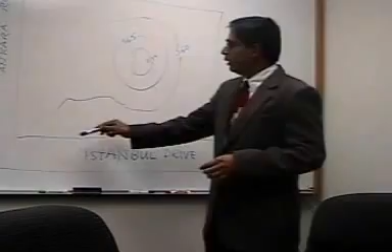Okay, so this is a property. Just for an example, say this is an agricultural land, and this is one street here. So the client comes to us and says, okay, this is agricultural land and I want to make it single family housing. So what we do first, we put the layout of his lots or plots, however you want to call it. That means one person owns this property.

We divide this property into maybe 100 lots or 50 lots, however the client wants. So first of all, we put a layout of all the lots. Layout means put in the street and divide this one. And this is not one single process. It goes by iteration, meaning trial and error until the client likes it.

And these are the existing contours, which show 570, 565 and 560. That means it's a little bit high here and it's going down. There is a street and there is a creek behind this property. It's a very simple property. I'm just using this as an example.

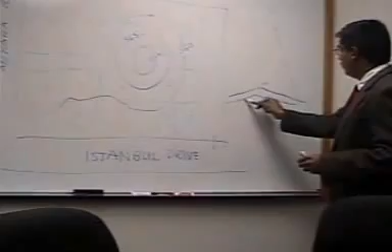So we need to design the street first, because in land development, the street is the backbone of the whole thing. If you cut a cross section from here, the cross section will be like this. This is 70, this is 70, and this is going down. This is the existing ground line. We designed the street in such a way that it will cut the existing ground and put the dirt from the street to the pad, so the pad will be a little bit higher.

The reason is, for the drainage, and I'll explain a little bit more, we want all the water from the pad to go to the street, so that the street will work as a channel to convey the water eventually to either a creek or some other existing storm line. The storm and sanitary are two different systems. Both pipes carry water, but one carries storm water and one carries sanitary water.

So we profile it in such a way; it's called the geometric design of this road. I told you all the branches of civil engineering are involved. There's the transportation part. We designed this.

I'm explaining in very, very short time. So now from this street grade, proposed grade, we put our spot elevation here, here, here, everywhere. Then from this street we put this spot elevation, meaning the elevation from the proposed grade, and we do the lot grading.

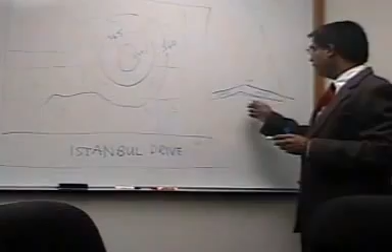Because if it's too steep, then it's not very convenient for drivers to drive. If it's very little slope, then water will not drain. So we don't put more than 10 or less than 0.5. So after profiling, we go for lot grading. Mustafa will explain lot grading to you in detail, because I don't want to go that far. I'll explain the overall.

Okay, let me tell you one thing. This is a lot, but nobody can build his house in the whole lot. There is a setback. It's called pad. Pad means the area of the lot where the people can build a house, because they need a front setback, side setback, back setback.

I told you before that I'm covering only single family residential detached houses. There are others, maybe townhome, maybe multifamily. Multifamily means apartment or multi-story house, but I'm not going there today. I'm just giving you single family. So this is a pad.

So we design the elevation of the pad from the street grade. We know this elevation, this elevation, this elevation. We design it in such a way that this person's water will not go to this person. We want to drain everything to the street. You mean water is storm water? Yeah, I'm talking about the storm water first. After 10-15 minutes of storm water, then I'll go to the drinking water and the sanitary water.

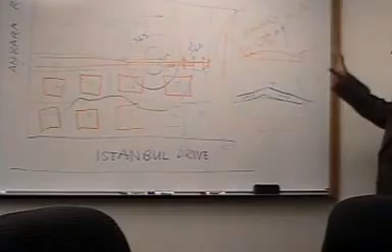We use this for open channel, for the pipe, and also for the pipe system and open channel, for both. So with this equation, we calculate the size of the pipe, like how much Q is coming here. Say 5 CFS water is coming here, then 10 CFS is here, so 15 CFS is coming here.

So now I'll go a little bit into pipe design. What we'll do here, say this point is called the head wall, that means at the exit point, and this is your pipe, that is your inlet, this inlet is somewhere else here. So from this inlet 5 CFS water is coming, here is 15 CFS.

And the main thing in designing the pipe is backflow analysis. That is very, very important. There's a water from the creek that will not come out through the inlet. That means the backflow analysis we have to do every time. The most important thing is you do backflow analysis so that the water will not come out from the inlets. How we do that, I'll give you a little bit idea, it's a 100-year flood.

What is the 100-year flood elevation? We know, say 550. So again, from the Manning's equation, if we know the Q, we know the velocity, we know the slope of the hydraulic grade line. So we start from the 100-year flood here, then we go from this length with this slope, we get this hydraulics, and then there is a jump on the hydraulics because the velocity is more than here.

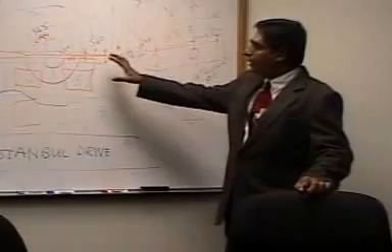So, are we going to talk about the sanitary now? Yeah, so they get a little bit of idea about the paving, get a little bit of idea about the storm. Do you think anything I should tell about the paving? I think that's enough for a short time. Oh yeah, that's enough for sure.

Okay, good. Now I'll go to the sanitary. Very interesting.

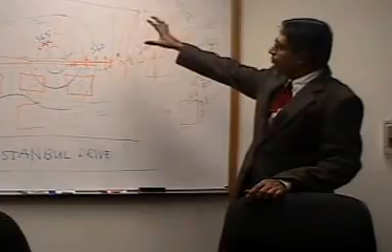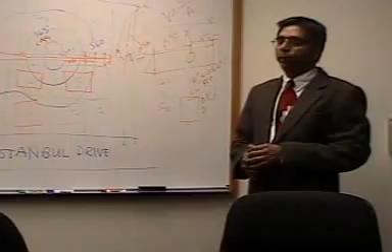When the city, say this city, they have already their master plan. So on their master plan, they know what they have, the population calculation, what will be the population after 20 years or something. That's the way they do it. I'm talking about the sanitary now, then I'll go to the water.

So they design their master plan. On the master plan, they already have sanitary here. The big pipes, this pipe may be 16 inch or whatever it is. It's very, very big pipe. This is done by the city.

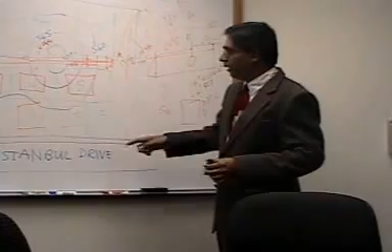When we connect our sewer line, if it's very little, like 10, 20, 30 houses, we don't need to calculate anything, because we know this pipe has the capacity to carry the sanitary sewer that will generate from here. But if we have a very big development, normally we use 8-inch PVC, sometimes 6-inch PVC for sanitary sewer, if there's very little population.

Okay, now we put the storm line here, we put the sanitary line. Maybe some cities say within the pavement, some say not within the pavement, between the pavement and the right of way. So wherever we put the sanitary, it goes like this, and eventually it connects with this, with the manhole.

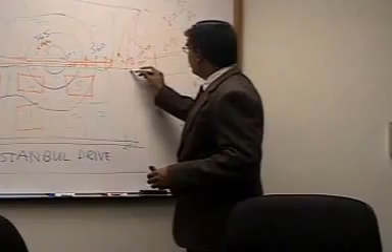We have to put the manholes wherever the pipe changes direction, or every 500 foot. Some cities say 500, some cities say 400 foot. We have to put the manholes.

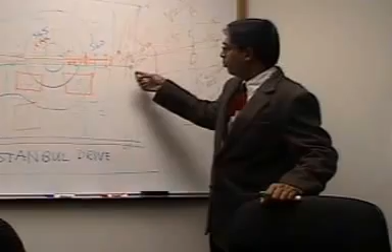So you put the pipe and you put the manholes, whenever it changes direction, you have to put one. I think this is a high point, so we can put it like this. So this house will be connected here, and we put it here. So this sewer will go this direction, this sewer will go that direction.

So I told you, if it's a very little area, then we don't need to calculate anything. We can use 8-inch PVC pipe and a couple of manholes and connect with the existing sewer line. As I told you, this is already done by the city sewer line, so you can connect here directly. But if you don't have that, meaning the city doesn't have this line already, or your development is such a big development, then in that case you cannot just put an 8-inch sewer line and connect here.

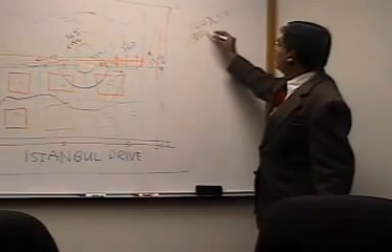You have to do some kind of calculation. The way we do the calculation is, I can show you: say per capita 100 gallons per day, 100 gallons per day per person. And the way we calculate that, each house has 3.5 people. So 100 times 3.5, 100 gallons per day GPD per person.

Then we have some peak factors. Peak factor means a certain period of the day when the demand is very high. It depends on the city, depends on the culture, depends on the country. If everybody goes at the same time to the bathroom for taking a shower or something, at a certain time, in a very short time, there's a peak factor. So it depends on the peak factor. Some cities say 5. If the population is less, you have to use a 5 times peak factor.

So your peak factor is 350 plus, multiplied by 5. Is that correct, Mustafa? I don't know. Looks like that. Gallon per day.

So this many gallons per day, 1750 gallons per day per house. And if you have 50 houses, then multiply by 50, equal to 8,000 or whatever it is. Maybe say 100, you have 100 houses, so 175,000 gallons per day.

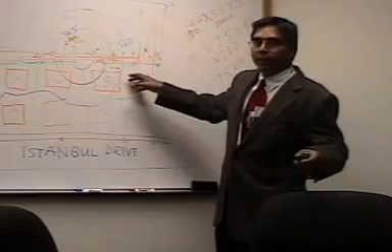Oh, you're talking about the water from the garden? Yes, watering the garden. The water from the garden will not go to sanitary, it will go to the street. When this guy puts water on his garden, this water will go to the street, and from the street it will go to the inlet, and from the inlet it will go to the pipe and go to the creek.

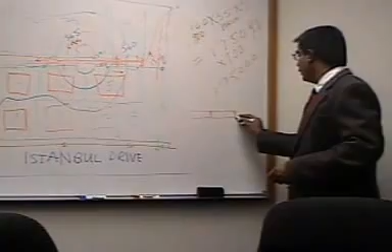But one thing we miss is that if it rains, the inlets and manholes are not watertight. So when it rains, some water goes through the manholes, and all the PVC connections, the pipe connections are not 100% watertight. So some water will go through that connection, and you have to add this plus infiltration.

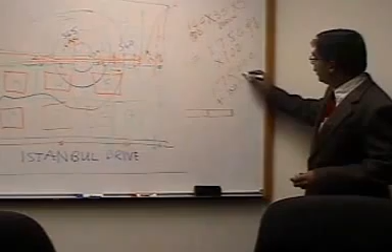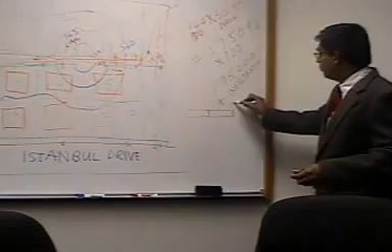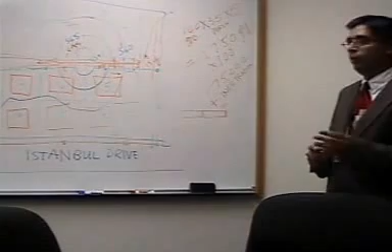It depends on how the city calculates that. If each city has like per acre this much or per mile this much, you add it all, and that is your total Q for this population, for 100 houses. Then you use the Manning's equation again, that I told you already: 1.486 divided by n, AR to the 2/3, S to the half. You put that in and you get the size of the pipe.

That's the way you calculate the size of the pipe in the sanitary sewer. Is there anything on sanitary sewer, Mustafa? I think you mentioned all what I'm prepared for. If you have any question, you can ask Mustafa, he can answer. He does all these layouts and design.

So we put the manholes, and sometimes we put the clean out. Sometimes normally we use PVC, some cities say no. If you have a pipe very close to sanitary and storm, sometimes the city says you have to put some kind of encasement, concrete encasement. Sometimes we put ductile iron pipe if you don't have enough cover. I think that's all, right Mustafa, on the sanitary?

Yeah, for storm I would like to ask about the pond, why we need a pond. Oh, okay sure, I'll stop here on the sanitary. Mustafa has a question on storm: why we need the pond. There's a couple of reasons I'll say we need the pond.

Say you have one existing... say this is a creek, don't worry about this creek, say this is a creek, and this is a road. Think in this way, okay? So you already have existing pipe here. Now this is no more creek, okay, it's a street now. That's the way I'm showing Mustafa. So this pipe is already built, and it has certain capacity.

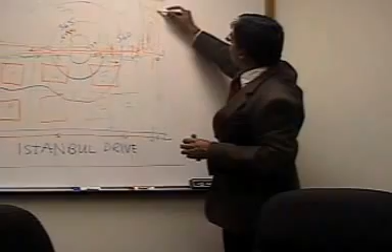You detain the water there. You cut the pond like this, so it has a certain volume. So you detain the water and then release it at a certain rate. The way we calculate this is called the modified rational method.

One thing I forgot to tell you, how we calculate the storm water is the rational method, which is Q equal to CIA -- everybody uses this. C is the factor, depends on the soil type and vegetation. I is the rainfall intensity, and A is the area. So to figure how much water is coming here, we divide the area into small catchment areas, and that gives us the peak Q, the water coming here.

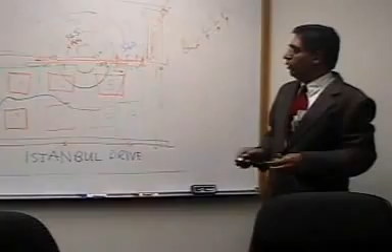I forgot to tell, okay, same thing for how much water is coming to this inlet -- we divide it, we draw a small drainage area map. From there we calculate how much water is coming to each inlet. So to answer your question on that pond, we detain the water to release it at a small rate.

Number one. And number two is, sometimes in an undeveloped condition, there's less surface flow because most of the water goes down, since C is very low, maybe 0.3 or 0.2 or 0.35. But when you build this, C goes higher, maybe 0.6 or 0.9, so you have more surface water. But sometimes the city says no, you cannot drain more water, you have to drain only the undeveloped flow. In that case, you have to build a pond too.

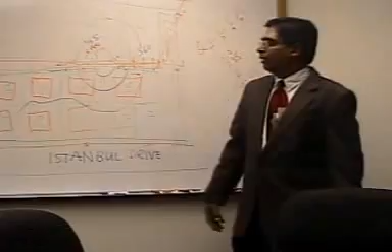Okay, now I'll cover how we design the drinking water. Again, there are a couple of ways. Number one, the city has already, in the master plan, put the drinking water line. Maybe a big size pipe, 48 inch or a couple of 60 inch or more than that. So they already have the drinking water line here, maybe here. If it's a small development, then we don't need to calculate anything. We just connect with this line and this line.

But here, the very important thing is, you have to put fire hydrants. This is our pavement. This is your water line; it comes here, goes here, meets here. So you have to put your fire hydrant. It depends again, every 500 foot or 400 foot. Okay. So that in case of fire, they can open the lid, connect the connection, and then that is used for

fire prevention. But if it's a big development, again like sanitary, then we have to think how to calculate this. In this case, Mustafa, we use 100 gallons per day for the wastewater, and for drinking water we use 245 gallons per day. I'm talking about one city. Some cities may be different. And then the same thing, 3.5 persons per house. There is no peak factor.

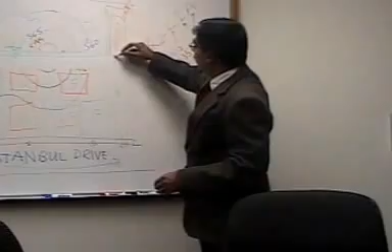Okay, each and every city has their own criteria, but you should have enough pressure on the pipe so that the fire hydrant has enough pressure in case of fire. So your pipe needs to be designed such that each and every node, meaning each connection, has enough pressure. It's done in the computer; you have to run the model and then see.

Other than that, I think it's pretty simple. If you don't have to run the model, if it's a small development, just connect 6-inch or 8-inch, normally 8-inch PVC, to the existing water line, and you're good to go.

I always wonder, we are always designing water, sewer, and storm, but we didn't design natural gas. How do they have the natural gas? How are they connected? Okay, very interesting. There are two types of utilities: wet utilities and dry utilities. Wet utilities are water, sewer, or storm. Dry utilities are phone, gas, and electricity.

We normally don't design those in our office, that's correct. The gas company has their own design engineer, and our general contractor cannot connect their pipe. They have their own contractor and their own design. So does that mean after the contractor develops the site, they come, dig the site, and build? What's their process?

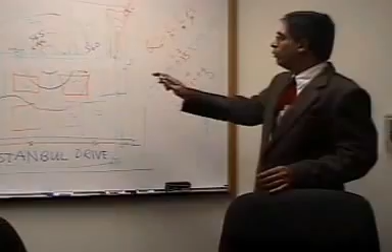No, normally they don't run under the pavement. Okay. That's the reason there's the right of way. The right of way means this is the area. At the beginning, I'll tell you one thing, that this development is private development, but one time the city will accept this one, and the city will maintain the paving, water and sewer. It's a public property. So the right of way means, although the pavement is here, this is the whole area that will be public.

This will never be public, because this is this guy's property. But this right of way is the city's, and all the dry utilities will go here. Yeah, I understand. So they will put that after. That's the reason when we design, we don't put sidewalk. Builder puts the sidewalk. Because if we put the sidewalk, and those franchise guys come, they need to tear off the sidewalk. So the developer doesn't put the sidewalk in front of the house. The builder puts the sidewalk.

Let me tell you how we calculate the size of the inlet. There's a couple of ways to calculate the size of the inlet. The easiest way, but it is very important where the inlet is located. If the inlet is located in the sag, that means it has very large capacity. But if the inlet is located in the street with a very steep slope, I'm talking about the street slope, if the street slope is very high, the inlet has much less capacity. So the location of the inlet is very important.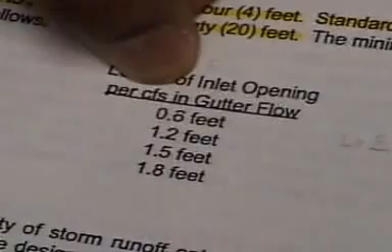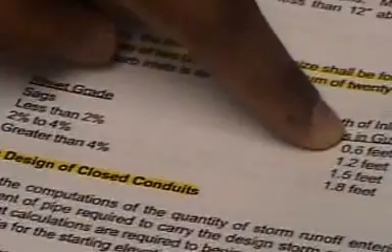I can show you the street grade and the length of the opening per CFS, that means cubic feet per second, of gutter flow. I think in the metric system it can be cubic meters per second or something. So for street grade, if it's in the sag, then your inlet size is 0.6 feet per CFS. So if the street is in the sag and you have 10 CFS of water to the inlet, the opening of the inlet will be 6 feet.

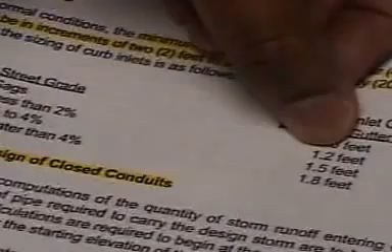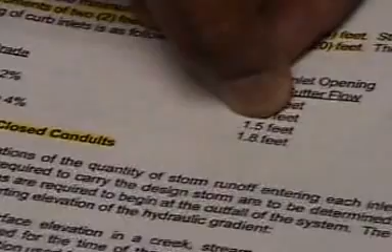Same thing, if the street slope is less than 2%, then if you have 10 CFS of water, you need a 12 foot opening, because it's 1.2 feet. If your slope is 2 to 4%, then with 10 CFS of water your inlet needs to be 15 foot. If the street slope is greater than 4%, then with 10 CFS of water you need an 18 foot opening. Okay, that's one way.

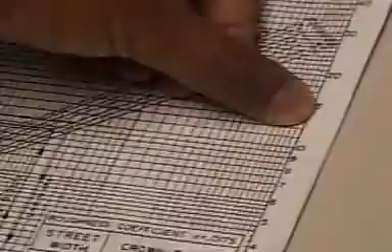Sometimes you can use this nomograph. This is a different city. It depends on what kind of street this is. Say a 4-inch parabolic crown street, 26 feet back to back. That means the pavement width is 25 foot, and the top is like a 4-inch crown. So in that case, if you have 6 CFS of water and your street slope is say 3%, this 3% and this 6 will give you a 10, 11, 12 foot opening inlet.

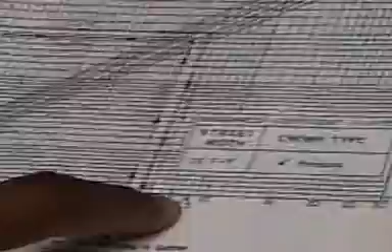Then what you can do, if you put a 15 foot inlet, because some cities say you can use only 5, 10 and 15 foot inlets, and some cities say you can use 10, 12, 14, 16. So whatever the city's criteria, if you need to put 15 foot, then you go to 15 foot and go to that 3% slope. That means the inlet capacity is more than 6. That's the way you can do that if the inlet is on grade.

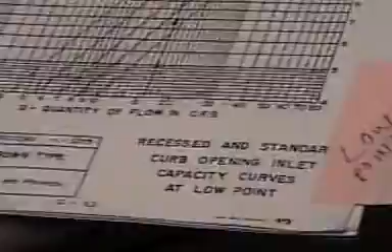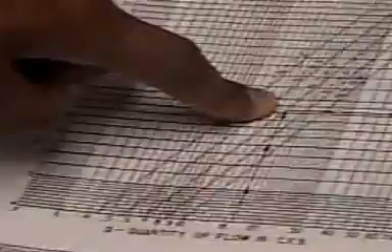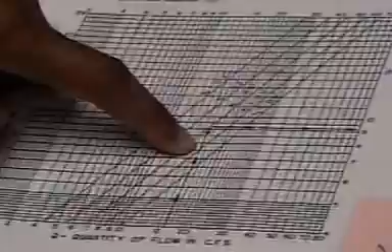But if the inlet is in the sag, at the low point, then there are a lot of different kinds of nomographs you need to use to calculate the size of the inlet. If you have like 15 CFS of water, and the ponding depth, that means how much water you allow in the street, say you want 0.5 foot, meaning the 6-inch curb of the street. So with 15 CFS of water and a ponding depth of 0.5 feet, you need a size of 8 feet.

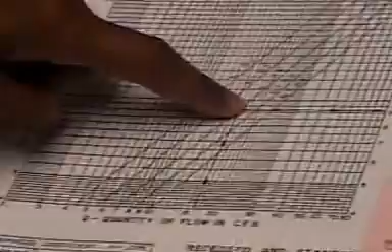So an 8 foot opening inlet can carry 15 CFS of water, which allows 0.5 feet, that means a 6-inch curb height. There are other ways, but these are the two easiest ways to calculate the inlet.